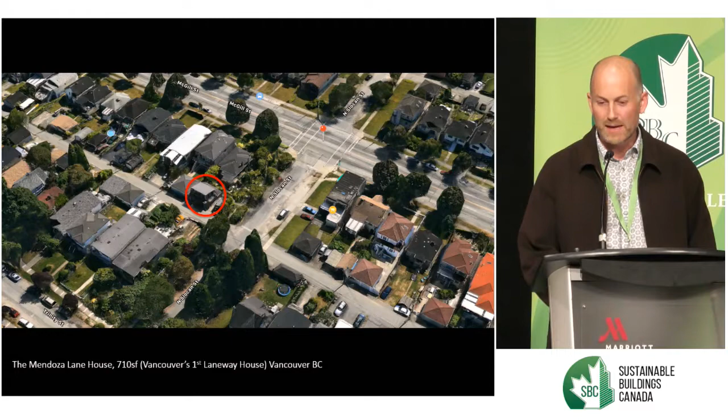That first open house drew a lot of interest. So we had 2 days of open houses with a line around the block. Over 1,000 people came through because people were so curious about this new form of housing in a city where there is no vacant land. So we kept motoring ahead from there.

We started doing a whole bunch of different Laneway houses. In the beginning, the city gave us extra square footage for a garage. So we would do these kind of fake garages that were fully insulated with drywall. The city then changed the rules and gave us more living space and put the car outside, which was a

good, sensible strategy. The rules say that the upper floor can only be 60% as big as the lower floor, and you have to face towards the lane. You can't look in your neighbor's backyard. So we start to be quite generative in terms of the form of these things from the zoning.

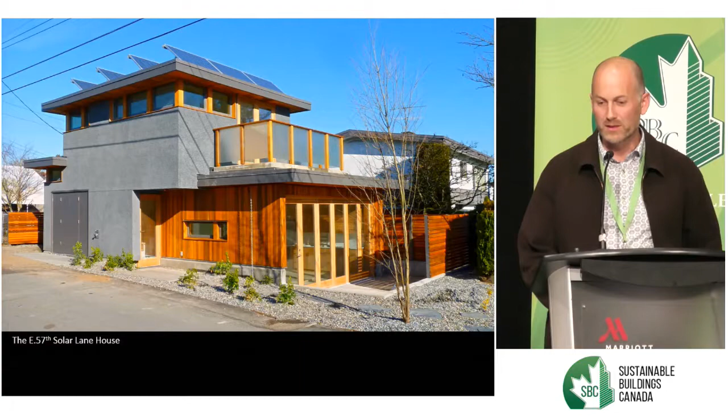Projects like this, we can get a bit of sunshine. We can get close to net zero on the Laneway House. Projects like this, we had to kind of go to the Board of Variance to relax it so that we can save that magnolia tree.

What we found is that we thought we'd do really standardized projects, but in the end, they've pretty much all ended up being custom. The sites, the zoning, everything is so unique that it really made sense to do a custom approach. We're doing sort of more industrial type stuff.

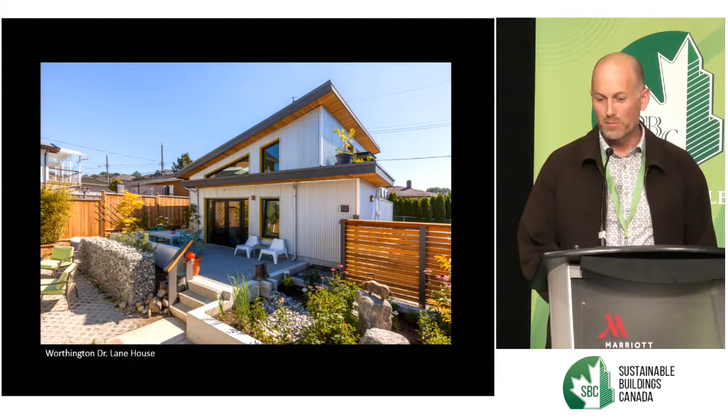A lot of it is extended family situations. So we've got couples building on their parents' property. The yard becomes this kind of shared courtyard space. A lot of them are multiple bedrooms. In this case, it's sort of a live-work loft for somebody working at home.

This is a 940 square foot Laneway house on a large lot. The large lot gave us the freedom to kind of spread out and try some different ideas in terms of the design. And we're building everything in there. We're building the house. We're doing the design work. We're building the furniture.

We can do some odd things. This is about a 600 square foot Laneway house, and that's a jacuzzi tub built into the dining room floor. Just threw it out on a whim, and the clients were like, sure. We're like, okay. So the idea being that it's closed most of the time, but every once in a while, if you want to open that up, it's kind of in this sort of indoor-outdoor space. But kind of fun ways to experiment with these little dwellings.

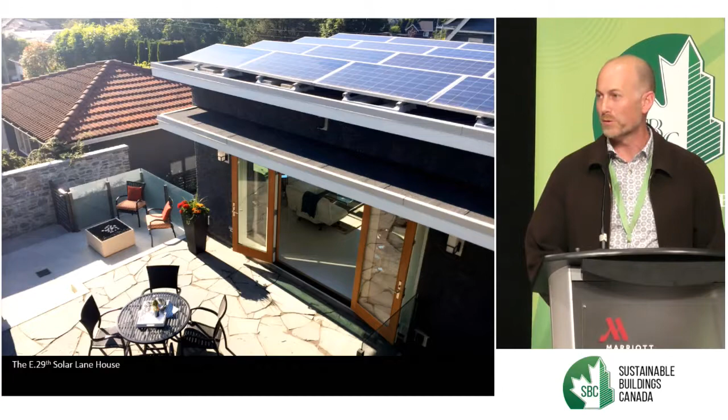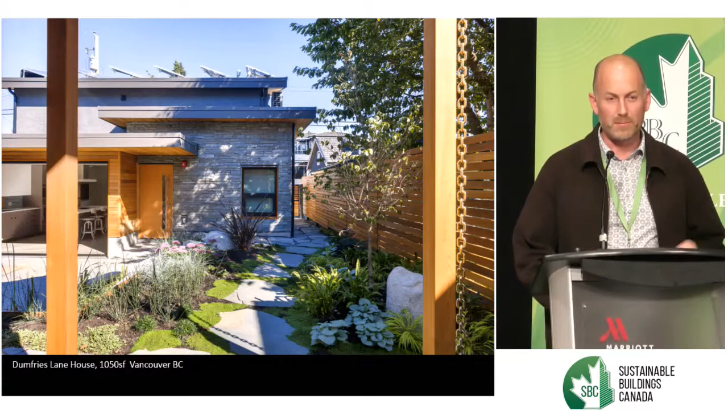Some of them were pushing the boundaries of net zero, putting solar panels, those kind of things, but really always working within the constraints of what the city has given us. Some of these, again, we're doing some work on the main house to try and tie it together with the Laneway house. In this case, we can see a project that was designed under the original rules, with a garage, but then they let us subsequently convert that garage into a home office and a second bedroom.

So this is really our typical client, and this is who we're building for. It's the young couple, maybe with a kid. They're looking at the prices of condos in Vancouver, and they're realizing that it's just kind of crazy. And so if they're lucky enough to have parents with land, they can build a really nice Laneway house for about half the price of buying a condo in the city. And so this has spurred this really strong demand for these kind of custom projects.

So from Laneway House, from the beginning, we were always interested in having a green building approach that we could do on every single project. We didn't want to do 8 code minimum projects and then 1 green one when we can convince some crazy client to just upgrade the windows or something. We wanted a standardized package that would go all the way through all of our projects.

Now, we branded the company partly with the name Fab to deal with the fact that we were using these prefab panels. The great thing about that is when people came to us, they expected us to do something different. And so when we told them that our walls are 13 inches thick, they were like, okay. And so whether they asked for it or not, that's what we do.

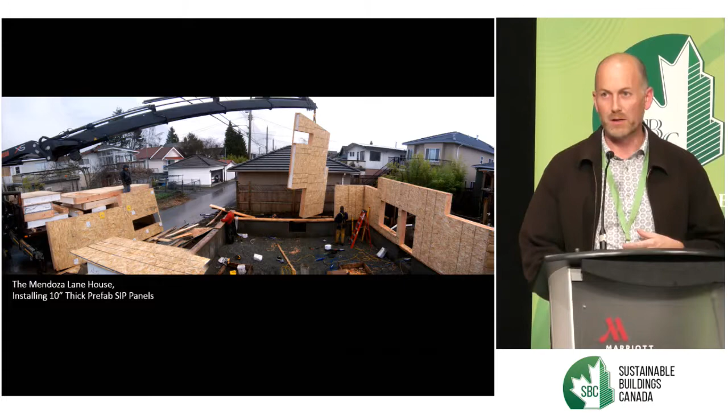So this is our very first Laneway house, 10-inch thick structural insulated panel, LED lighting, triple glazed windows. This has become our default package for, I don't know, 80 plus homes that we've built over the last several years.

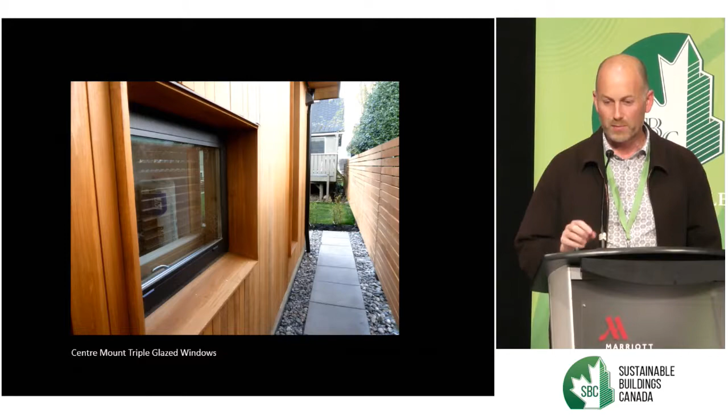And so what I'm trying to get at is that we were coming up with our own systems, but as we were going through this, you know, we're doing triple glazed windows mounted in a thick wall. We get these deep exterior window reveals, which really become kind of a signature part of the way our buildings look. We started developing a 2-part wall system because with a little tiny laneway house, we needed to run plumbing and other services on the outside walls.

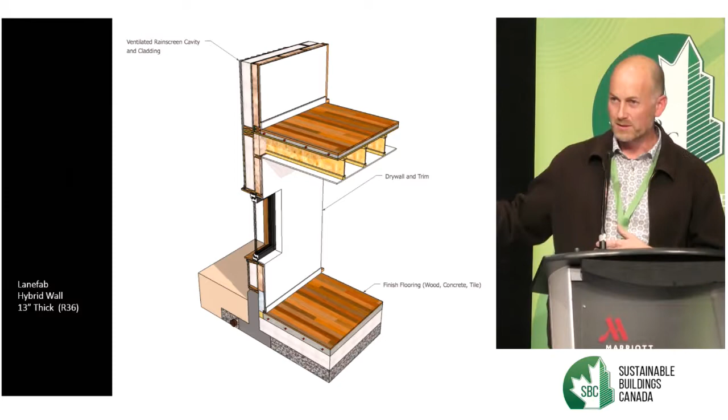We've got continuous insulation running under the slab and up the inside. What we found is all of a sudden we were starting to drift almost inadvertently towards doing something similar to Passive House. So we started going to conferences and learning about this Passive House system. Now this Passive House, like LEED or whatever, is a sort of a certification system. It was developed in Germany based on Canadian ideas.

And we started sort of embracing this and saying, really, this is not that different than what we're doing. It just happens to have a lot more intellectual rigor behind it versus us. We're over here just kind of doing whatever the hell we think we're doing. I don't know what we're doing. But this is sort of evolving as we're going forward.

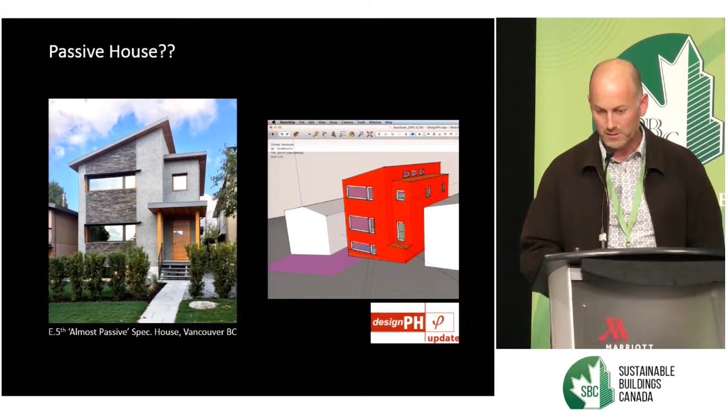So in this project, we started using a plugin for SketchUp called DesignPH, which lets you do Passive House energy modeling in 3D in real time. So this is a really cool tool where you can stretch windows bigger, change the R values, and see right away how that impacts your energy demand. And so from that, we started to build, like this house was a spec house, and now with this house, yeah, we're designing Passive Houses in Vancouver with 17-inch thick walls, triple glazed windows.

We had a client approach us. He had designed this suburban house and he wanted us to make it a Passive House. So we worked with him to redesign the assemblies and the systems. We've got about R100 in that roof up there. The other piece we're doing is to get to really high levels of air tightness. So this house was about 0.4 air changes per hour. To be a Passive House, you've got to be a maximum of 0.6 air changes. So a really high level of air tightness.

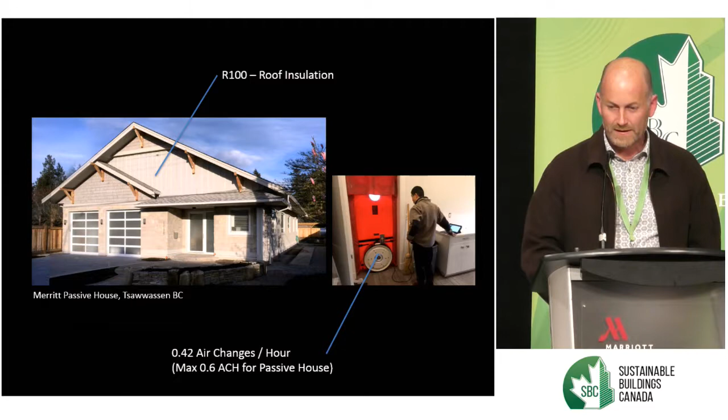And all of this work with Passive House is around trying to achieve these really rigorous energy targets. And to do that, we're using this big monster of a spreadsheet called the PHPP. Has anybody here used that? Yeah, you're familiar with that. So it's this big old thing. And part of the reason why Passive House does such a good job of delivering performance that actually matches the modeling is that the PHPP is so rigorous.

But there's these targets here in terms of energy per square meter that when you're first starting with Passive House seem totally arbitrary. And you're like, why the hell did they come up with these numbers? Like, why isn't there Passive House Silver and Passive House Gold and Passive House Platinum? You know, why can't I just do a kind of Passive House? And you think, oh, these Germans are just being super uptight or whatever.

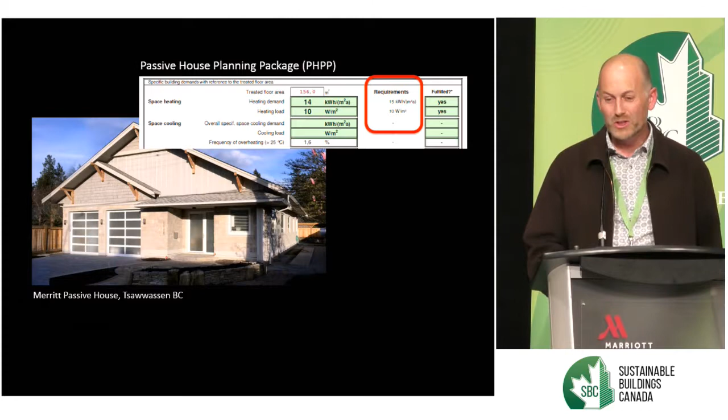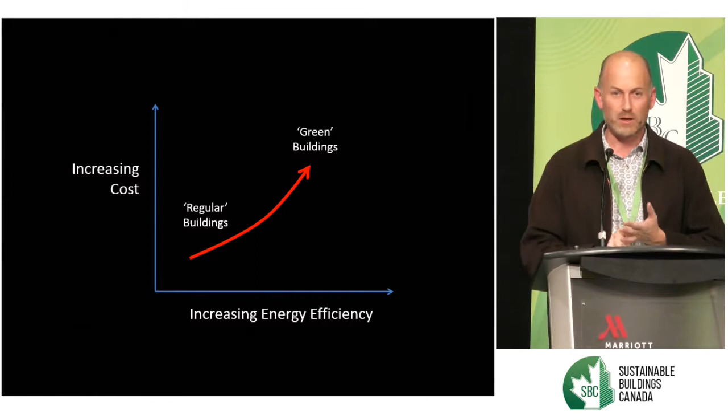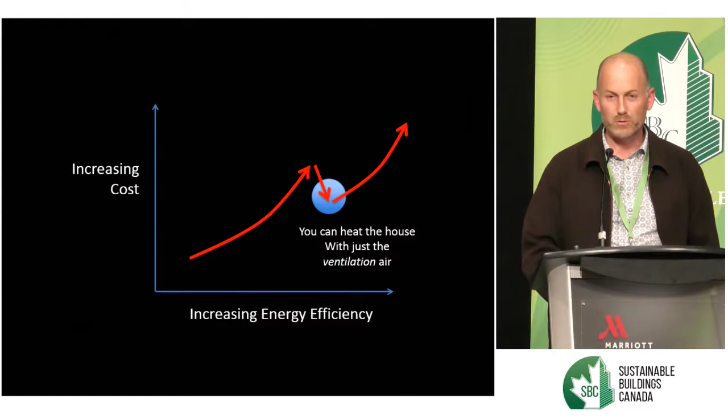Eventually you come to realize, and after enough conferences, it sort of sinks in, that within this spectrum of cost-benefit analysis, as we're increasing the energy efficiency beyond code, a lot of times the cost is also going up because we're getting better windows or whatever it is and some kind of ROI. But there's a discontinuity in this curve partway through. And that's right where you've gotten enough insulation, it's airtight enough that you can heat or cool the house using just the ventilation air.

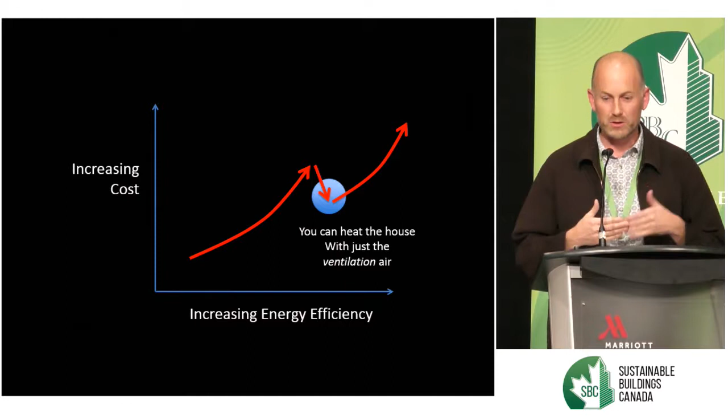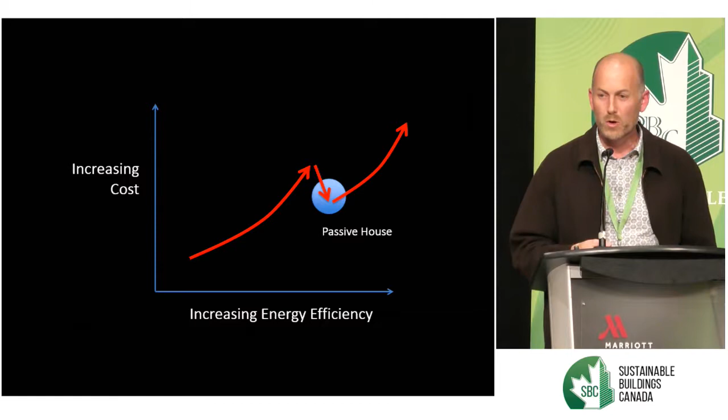And what that means is all of a sudden you can take out the central heating system. You can get rid of the boiler, you can get rid of the natural gas service, you can get rid of your concrete toppings for your in-floor heat. There's a variety of things that can come out of the cost because you've reached this kind of tipping point. And this is exactly where those Passive House targets come from. And so I started to become much more willing to engage with the system once I understood that there was this kind of thinking. And it's not about greenness, it's really an economic argument about why we do these super efficient buildings to this level and not beyond.

So from there, with our practice, we realized that this was very much in line with what we wanted to do. So we've moved towards making Passive House our default standard for new full-size homes. It's quite difficult with laneway houses because they're little, and Passive House doesn't let you cheat. A laneway house is a very inefficient building form. So we're doing kind of our own version with the laneway houses, but with the full-size houses, we're shifting towards Passive House.

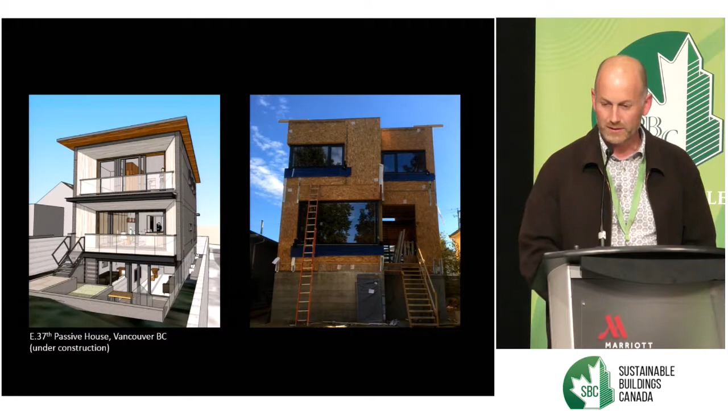So this is another project we're just starting construction on. It's 2 passive houses in the front and 2 net zero laneway houses in the rear. This is another one that's in for permit, a passive house with a laneway house. This has a basement suite. A lot of western exposure, so we've built exterior roll shades into this kind of awning element because we're trying to get a lot of sun when we can, but not too much sun.

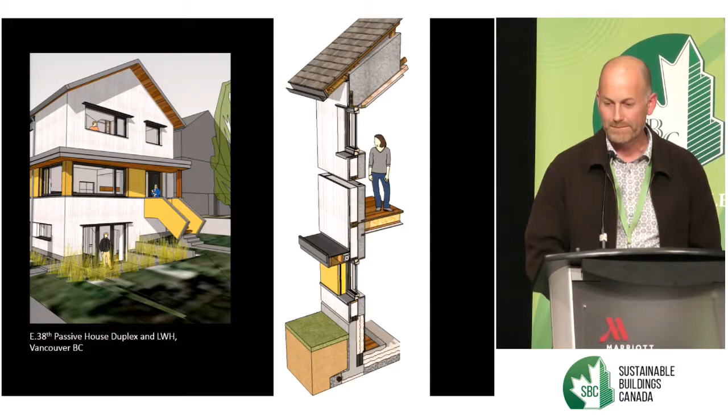This is a passive house and laneway house we're working on, a very difficult east-west lot. Difficult because that house next door is taking up all of our sun. That illegal rooftop cover that they have on their roof deck is taking about 1.5 kilowatts out of our target. So these are the challenges we face working in the city compared to some idealized situation out in the country.

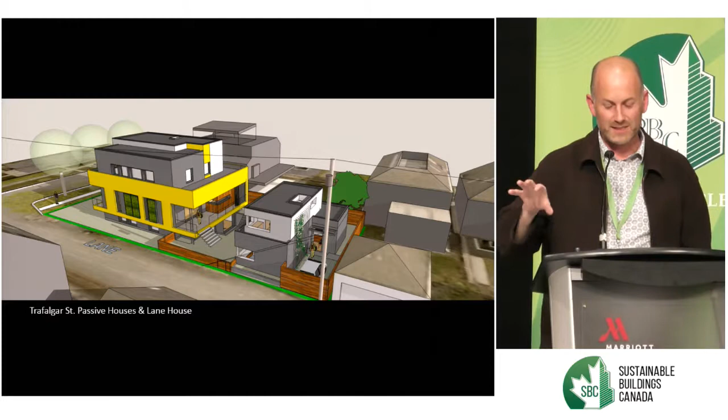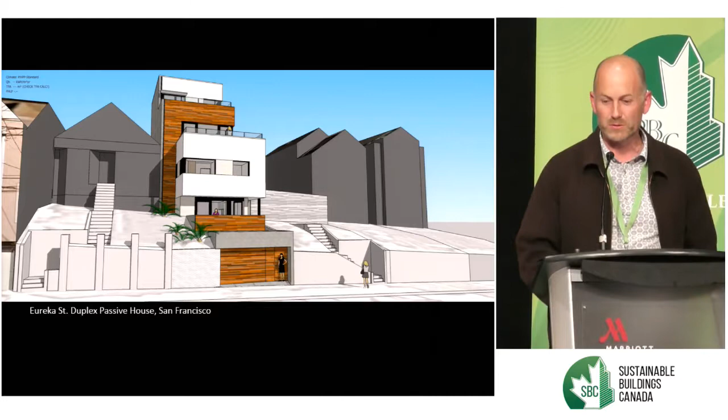This is a passive house duplex that we're working on in San Francisco. The climate there is so benign that actually our standard laneway house package works as passive house. It's just a benign climate. So it's quite easy. We can be much more articulated with the architecture. So from here, that's the kind of arc of our work. We've done a lot of laneway houses. We're now moving more and more towards doing full-size passive house.

But what we started to get at was that there were some missing pieces from how we felt people were talking about green buildings. And part of that is that a lot of times we end up focusing on these very little details. And maybe some people in the room here can tell me what the psi value of that installation is, the thermal bridge value based on where you put the window. Passive house is full of this kind of micromanagement of tiny little details. And we sometimes forget to step back and think about how that fits into the big picture.

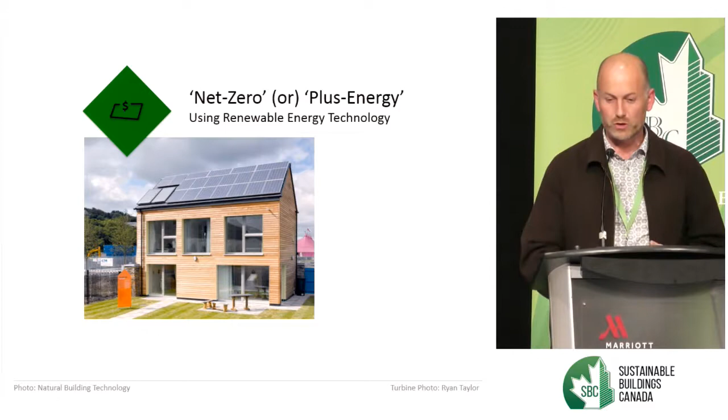In other cases, maybe it's focused more on the technology, the green bling. If you put enough solar on it, maybe the house is good, maybe it's not, but you can put this green technology and you can kind of attach it. And a lot of the discussion around how green is your home came down to these bits about the envelope or the technology. But the problem is that there are some pieces missing from this conversation that mean the targets that we set for green building are sometimes leading us in the wrong direction.

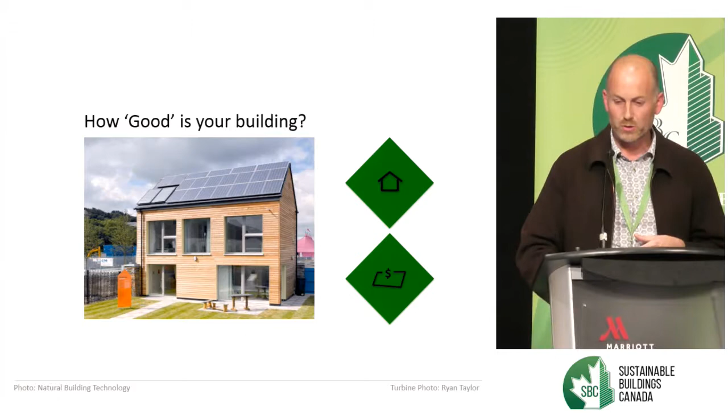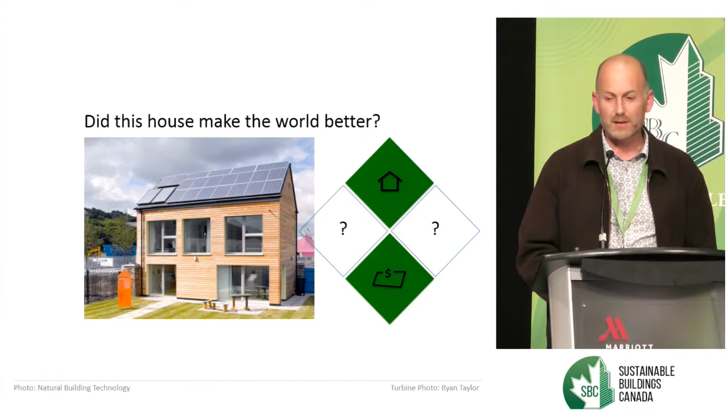So what we're trying to do is bring about a shift in the way of thinking, a shift away from focusing just on the artifact to saying what is the story of that artifact and the impact that it has on the world. So not just how good is your building, but did this project, this house, actually make the world better? And we want to not just be fuzzy about that. We want to actually measure it, look at what was before, what was after, and say, did this house make the world better? So to get at those pieces, I just want to go through an example.

But there's something missing that you don't ever see in the pictures of Amory's house. And that's the parking lot. Because this house is out in the middle of nowhere. And you've got to drive there. And if you live there, you've got to drive.

If you want to get a loaf of bread, you got to drive. If you want to do anything, you got to drive. So we don't see that because we don't talk about that as part of the story of this building. And it just drives me freaking crazy because, you know, here I am struggling against the zoning bylaws, working in a dense city trying to do infill, and it's a pain in the ass, frankly. But the impact of location is profound.

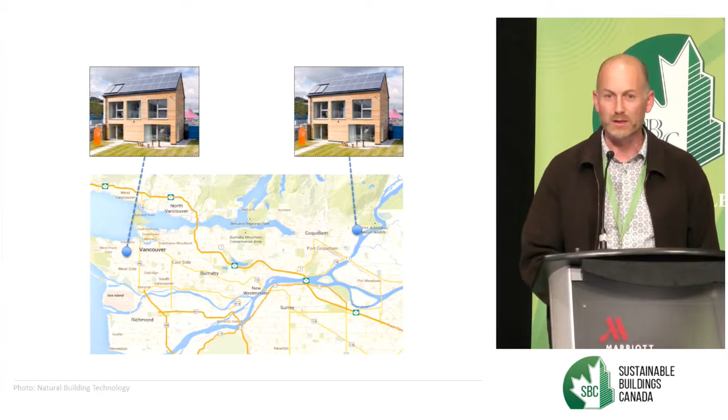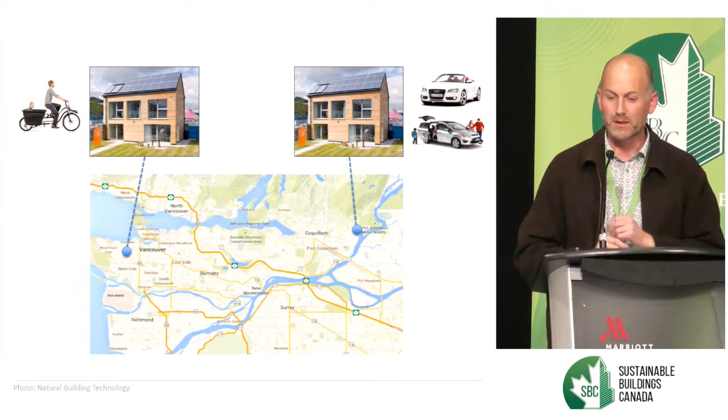So let's take a net zero home and let's put it in two different places in the region. In one area, you can bike, you can walk. In another location, you've got to drive. Everybody in your house has to drive. Maybe you've got 2 cars out in the driveway. So the exact same building, but two profoundly different ecological and climate footprints for those families, even with the exact same building. And a good way to capture this is looking at the walk score.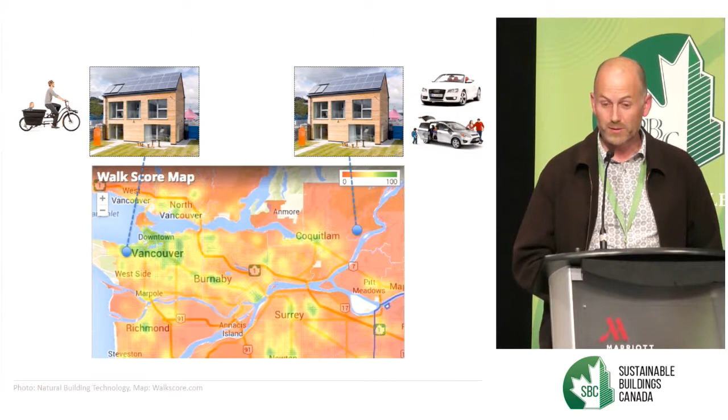It's such an easy, simple tool to get a grasp of the walkability of a location. So in one location you can drive, and another location you can actually walk. And this starts to become profound in terms of how we compare the types of projects, where do we spend our green building dollar. Because you might be better off in this drafty old house in a walkable location than building your net zero house out somewhere in the middle of nowhere. Once we start thinking about transportation impacts as part and parcel of that project, it changes the conversation.

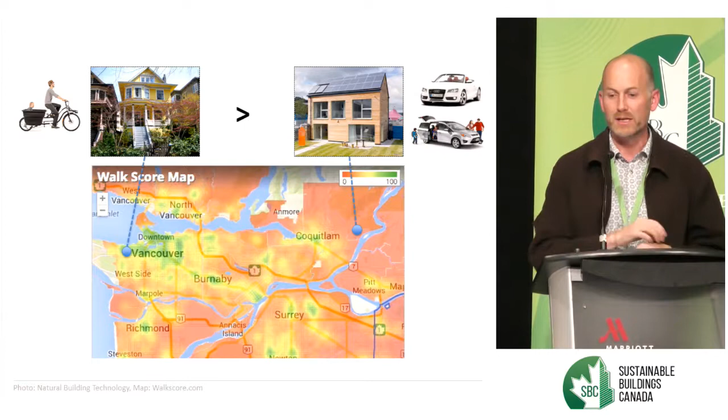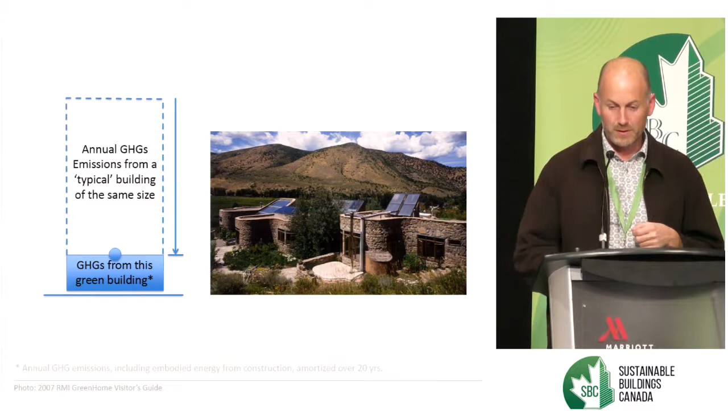So if we look at Amory's house, it uses just a fraction of the energy on an ongoing basis compared to a typical house. But when you look at it, the real impact also includes the impacts of transportation. So I'm giving you this little icon just saying where is it located, because this is one of the missing pieces whenever we see an article about a green building, about a new net zero project or whatever. It's often forgotten and we need to start to include it.

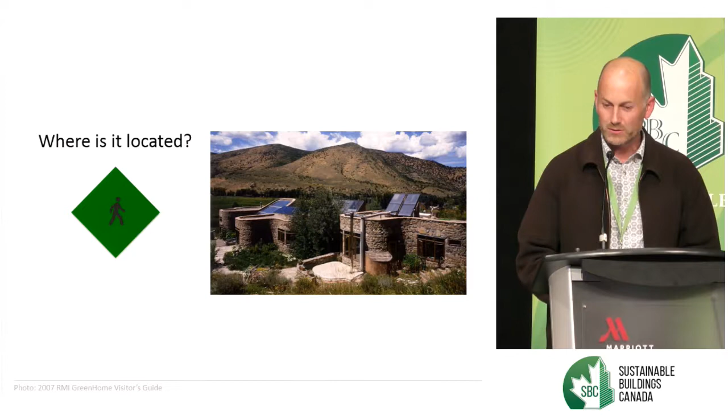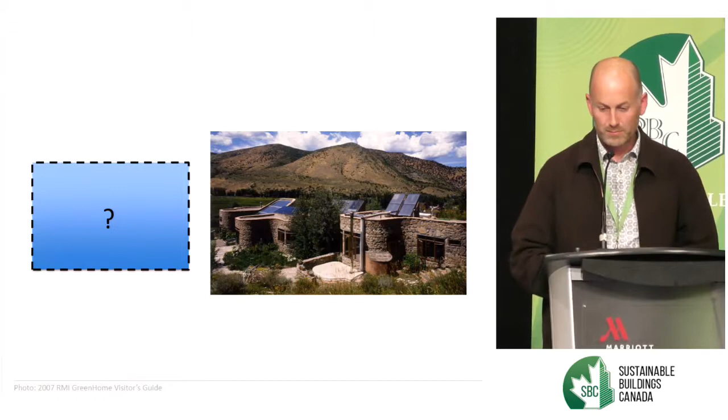So there's one more piece, another missing element, which is talking about not just the building, but what came before it. Because this was built on a greenfield site somewhere in the middle of nowhere. There were squirrels and beavers and other kinds of things. I don't think they were burning any fossil fuels at the time. So we went from a state before to a state now, and that's the cumulative impact of that building, looking at it from before to after.

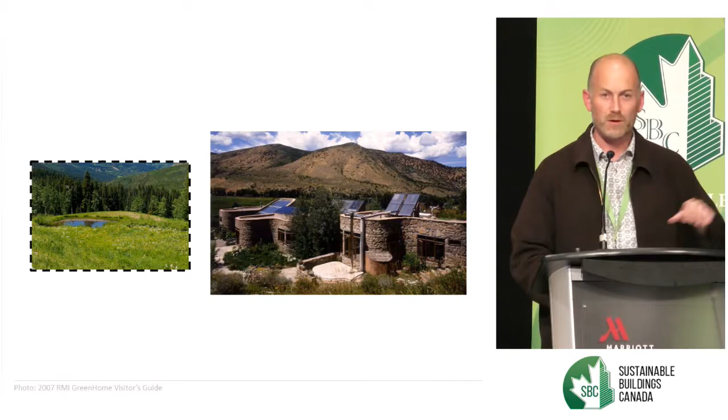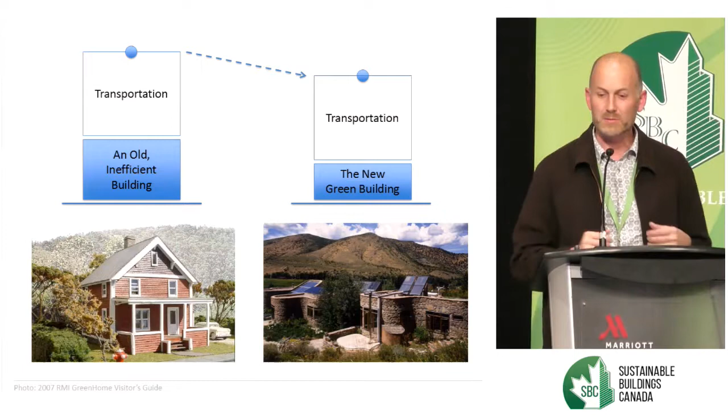So let's look at it differently. If that building had replaced an old house, the story would be fundamentally different. The impact of that project on the climate would be fundamentally different if it had either renovated or replaced an old climate hog that was just burning fossil fuels and spewing it out in the atmosphere. So this is the thing. The artifact is one thing, but the story of it can be very different based on some of these choices.

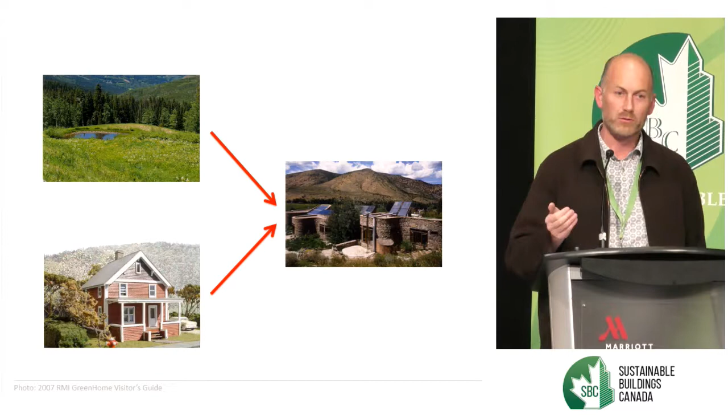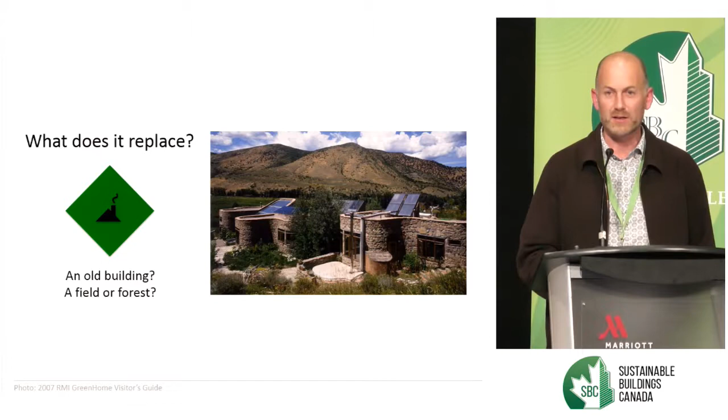So in this case, we've got one where it's a good green building, the other where we've gone beyond just being green and we've actually had a net positive impact. We've actually reduced the real greenhouse gas emissions going out into the atmosphere. So this other piece is saying, what does it replace? And this is another thing that we rarely hear about when we talk about green buildings.

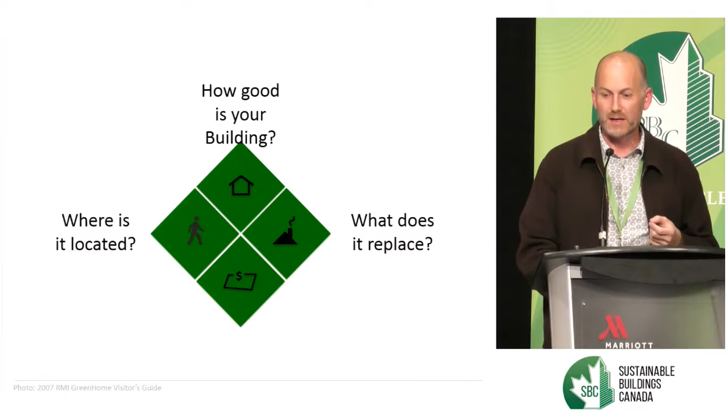So the stuff we always hear about, the building envelope, the green bling, the technology, all that kind of stuff, great. But also, where is it located? What does it replace? And these start to be the 3 questions that I look at every project through.

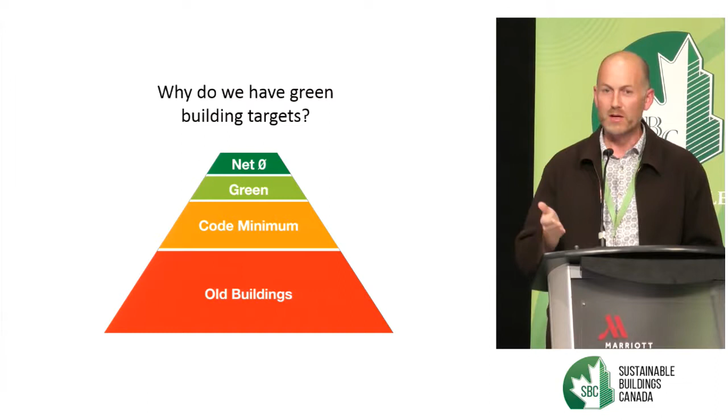Now, in terms of how this all fits together, all of us here are involved in these sort of leading projects where we are opinion leaders. And what we are doing with our green building projects is then influencing the building code, which is then influencing the code minimum buildings, which then become the building stock of the future. So we have this whole mass of existing buildings, and what we're doing at the top really is critical because it points the direction for everyone else to go that way.

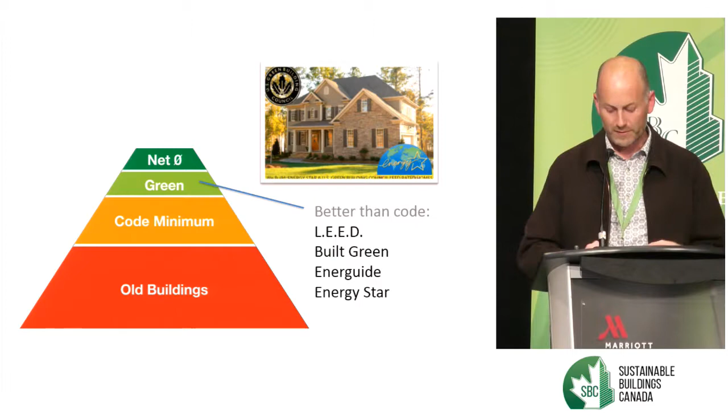So when we're doing a LEED project, we are doing something that's great. It's transforming the industry. A lot of those LEED standards have then been adopted into code, and we get this steady turnover of the fleet of buildings. And above that, we have this class of buildings that are really aspirational, that are trying to be zero impact. They're trying to bring the impact of that building down almost to nothing.

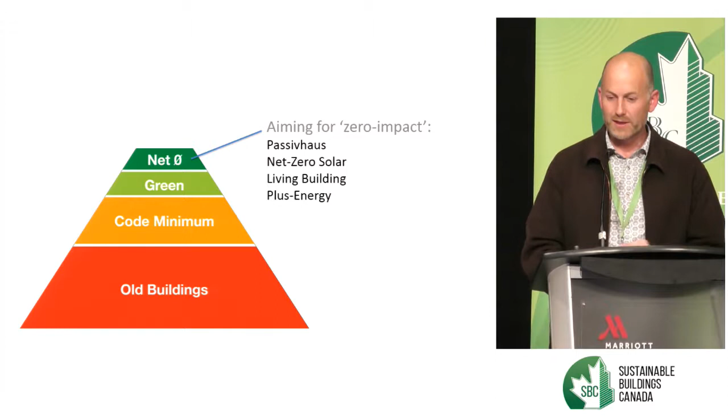And we're starting to see Passive House, the Living Building Challenge, again starting to influence LEED, and it's trickling down. And I think that's all great, but we've started to grasp that if we want to address the climate crisis, we really need to start going beyond, and that means going beyond zero impact to projects that actually make the world measurably better. And that's what I would call a net positive project.

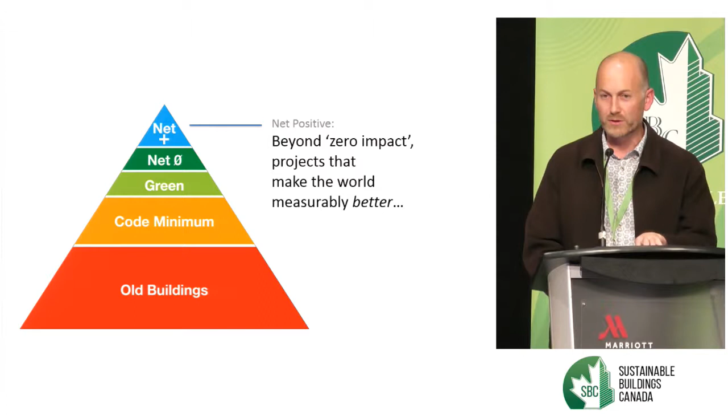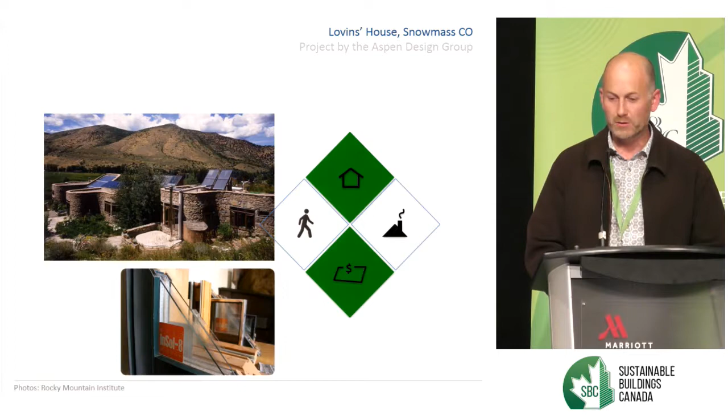You're looking at it before, you're looking at it after, you're saying, do I make the world better? We're asking not just how good is your building, but where is it located, what does it replace? The Lovins House, great building, greenfield site, walk score of 0. If they wanted to be net positive, they'd have to throw a whole lot of solar to offset the transportation.

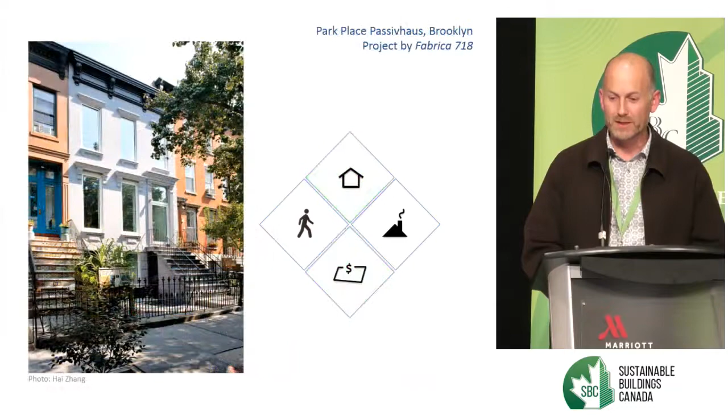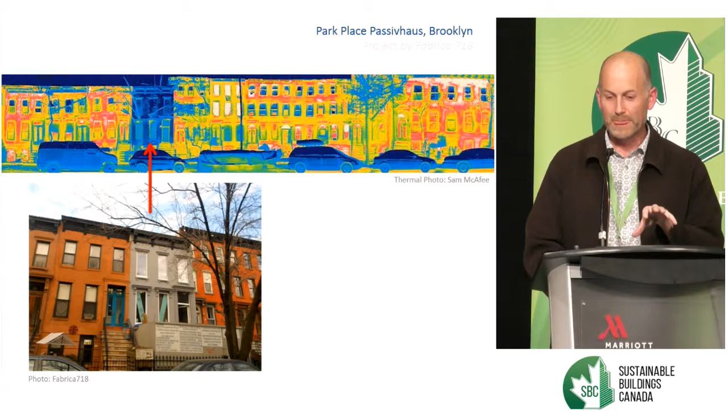This is fundamentally different. This is a Passive House retrofit in Brooklyn. So that's the heat photo, showing the transformation. This is much like the EnergieSprong stuff earlier. The transformation of this building from an energy pig to one that saves energy. At a walk score of 100, we've added space while reducing the total climate impact. This is a substantially net positive project.

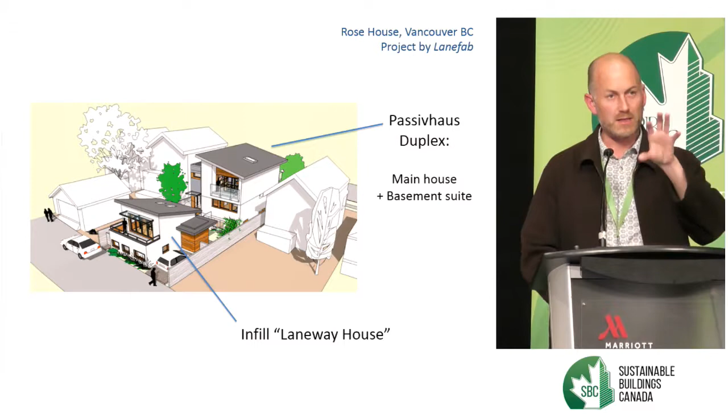So I want this to be the new face of green building when we think about what a green building is and what a net positive project can be. In Vancouver, we're combining Passive House main units with Laneway houses. The goal is that those new units use less energy than the old building that they replace. And they do it in a place that's more walkable than the regional average. And if we can combine that into a better housing form, it gets even better.

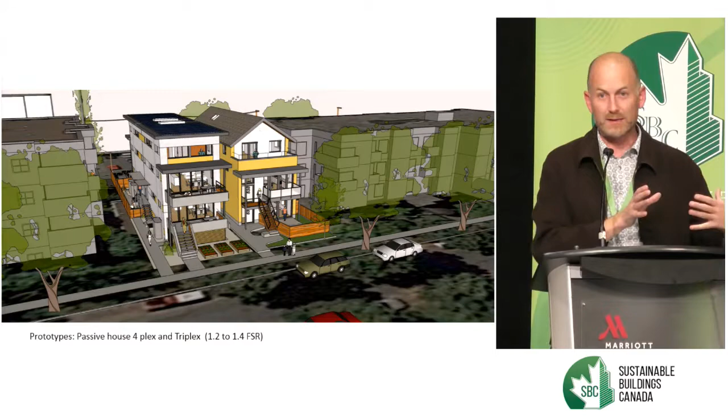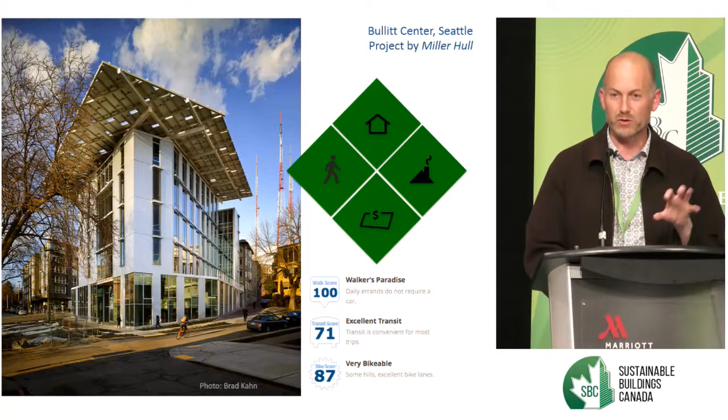This is a Passive House fourplex in Victoria, BC. This is a great type of thing. If we can do Passive House multifamily in walkable neighborhoods, I think a lot of our climate crisis is starting to be addressed. The Bullitt Center, you guys know this. I don't think it's great because of the crazy solar hat. I think it's great because they picked a site that was a walk score of 100. So different than so many other corporate strategies.

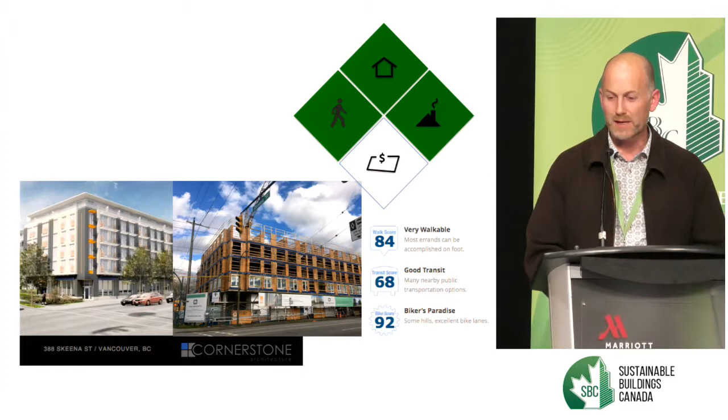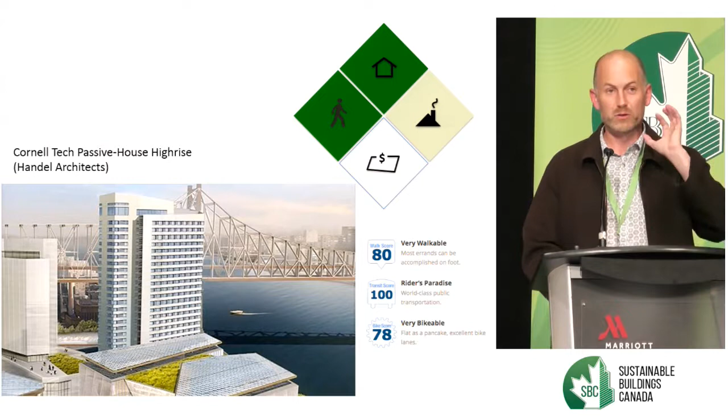So we're starting to see a real transformation in the thinking of Passive House away from the house part to really urban, interesting, dense projects. And if you live somewhere rural, that's fine. Find an old house and make it better.

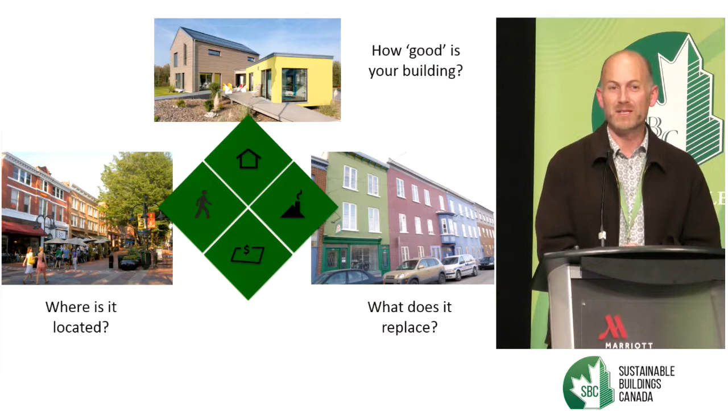So these are the 3 questions, and I think this really gets at the fact that we can't just stop looking at the buildings. We need to look at our zoning policy, our urban infill policy, and we also need to look at this swath of existing buildings, because those existing buildings are actually gold mines of potential carbon reduction, just waiting to be captured. So as much as that greenfield site up on the hill is so tempting from a design point of view, it's really not the future of where we need to go as designers.